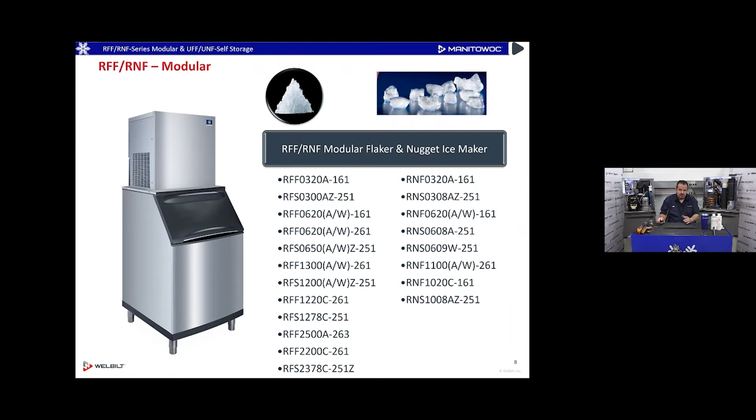So there's a various list of models, everything from a little 300 all the way up to a 2,300 pounder on those ice machines. Now, something with Flaker and Nuggets that is unique is you want to use a special kind of cleaner, and this is the metal safe cleaner.

I'm going to have Will zoom in just a little bit for me on the cleaner type. So they don't use the regular—thank you, Will.

They don't use the regular Manitowoc ice machine cleaner descaler. They use the special metal safe cleaner descaler because some flaked and nugget evaporators are made of a different material that the regular cleaner is too strong for. Most of them nowadays, I'd say about 80-90%, are all stainless steel evaporators, but there are some still out there that used a different material evaporator that it was too strong for.

And you don't really know what kind of evaporator material it is unless you pull the evaporator apart, and you don't want to have to do that just to see what kind of cleaner you're looking for. So we use metal safe on all Flaker and Nugget ice machines.

Thanks for zooming in on that, Will. We'll go back to the presentation just a little bit.

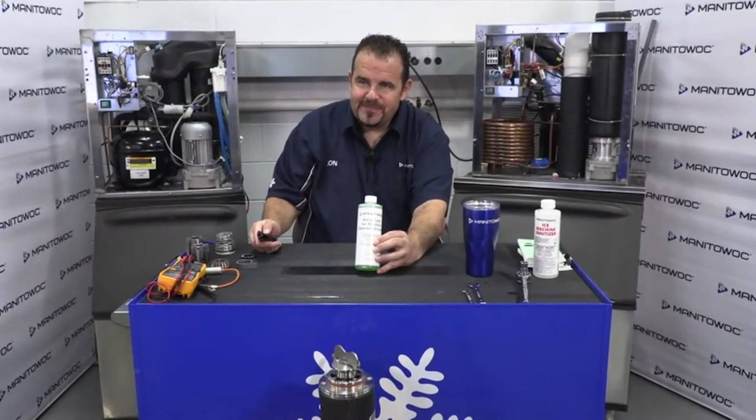Thank you. So just to review, we talked about so far a little bit of model number identification, just to get you familiar with it a little bit.

Self-storage under counter units—those are units that have a bin built into them, and we call those self-storage a lot. And then modular, where we sell an ice machine without storage means.

So it might be going on top of a bin. If it's a really big flaker, it could even be going on top of a walk-in with a hole cut in the roof of the walk-in and just raining flakes in there for a really big seafood store. I've seen a lot of those before.

A modular could be going on a soda dispenser. Now, there is no soda dispenser that likes to dispense flaked ice. They won't do it. But nugget ice, soda dispensers will dispense nugget ice, but they normally need a kit in them that sometimes people forget to convert them to nugget ice.

You can't just take a soda dispenser that's pumping out cubes, throw a nugget machine on there, and expect it to work. They need a different kind of agitator, and sometimes they need a level management kit on them to change the ice level.

So check with your soda dispenser manufacturer, whether it's Lancer or one of our Servend or Cornelius, to see if they need a nugget conversion kit. That's very important when you put one on top of a soda dispenser—you can't just throw one on top of there.

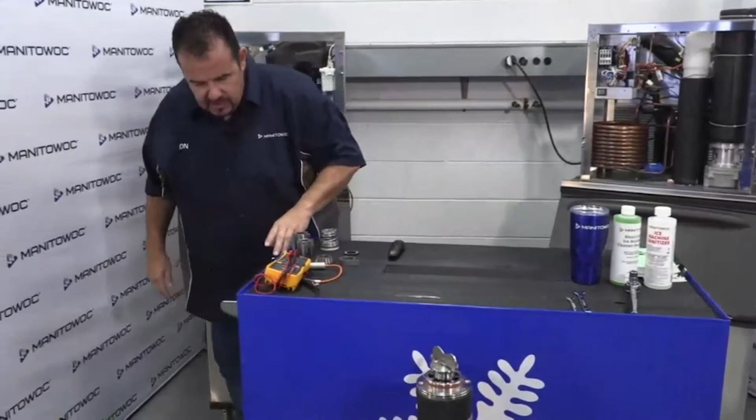All right, so we're going to take a look at a Flaker evaporator unit here in just a second, and I'm going to go through pulling it apart. So I'm going to get up from my seat and come around, and Will's going to work the camera for me so we can show you taking it apart a little bit better. Thanks to Will, by the way, for being on camera and doing about 25 things in the background.

So I've got both a flaked ice machine and a nugget ice machine here, and I've taken them out of the unit. Now, you don't have to do that to service them, but I've taken them out just so you can see it better. Don't think you've got to suck the refrigerant out and cut the tubes to do this kind of stuff—they can be rebuilt without it.

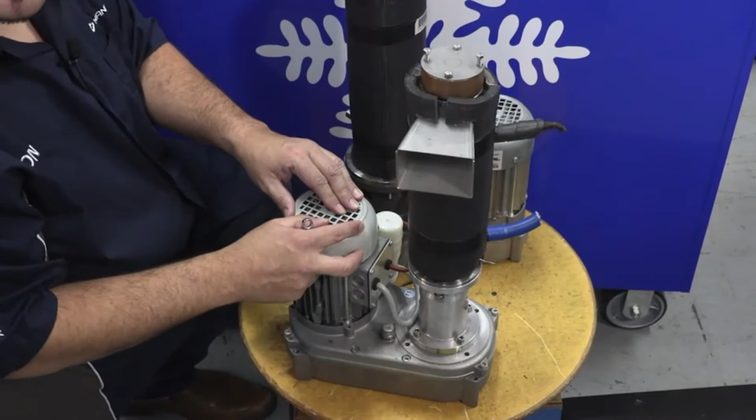So the first one I'm going to do is this flaked ice machine right here. I'm going to be undoing a few bolts here, so be patient with me as I take it apart. Now, why would you do this in the first place? More than likely because you've got complaints about bearing noises.

People are saying it's squealing really loud, it's making a really loud noise, and you want to look on the inside of the evaporator and see what those bearings look like, see if there's any damage in there or any damage to the auger. So we'll take it apart, okay?

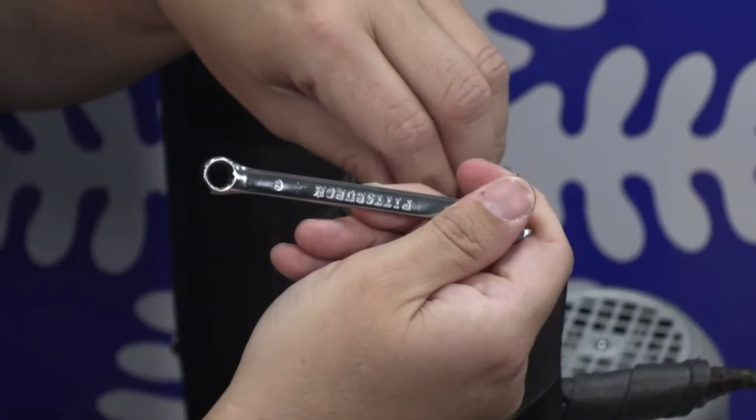So I've got 4 bolts on the top. I already got 2 of them loose, and I'm going to undo the other ones. Now, these are all metric hardware too, so I'm using an 8mm wrench right now to undo the other 2 bolts that I didn't get undone yet. Just remember, Flakers and Nuggets are metric hardware on the evaporators, metric, okay?

So you need to go into your other set of tools sometimes for that. I undid all 4 bolts, and this plate will just lift off. I should also mention, I removed the insulation that was sitting on top of this head as well. It just pulls right off. So I'm going to take that plate out of the way.

Now those 4 bolts, 1, 2, 3, 4, they're holding the breaker assembly in place. I shouldn't call that a breaker, that's just what I'm used to. We normally call it an extruder now, and that's the part that the ice gets forced through. Notice this flaker is a side discharge, okay? Some of our evaporators are top discharge, but the flaker is a side discharge on this particular unit.

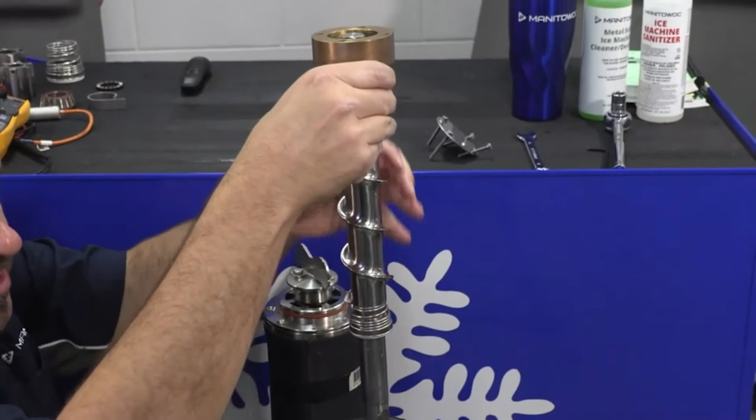So that got it nice and loose, and that's going to allow me to remove the auger. So I can lift this auger up out of the evaporator, and I'm just going to stand it there for a minute so you can see it. It's got the top bearing and breaker assembly on the top of it.

Top bearing extruder assembly on the top of it right here. That has 1 bolt in the top. I'm just going to lean that towards you. You undo that 1 bolt, and you can remove this bearing assembly and extruder as well, and replace it as an item on it.

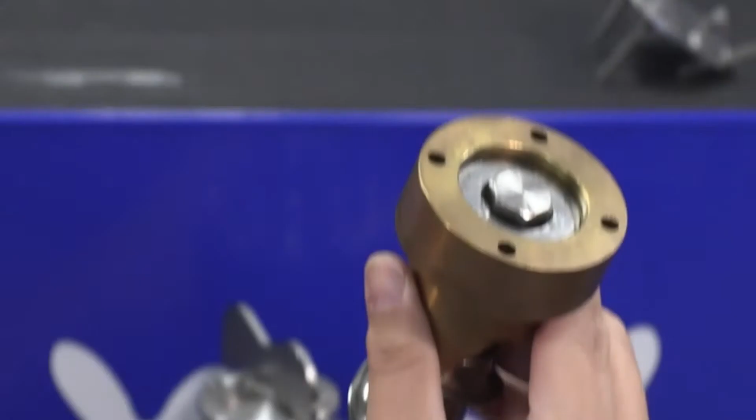So what I like to do is hold this bearing assembly, and I just kind of turn the auger in my hand to see if I can feel any kind of notchy, sandpapery, gritty feeling in that bearing that will tell me if the bearing's got damage or not. I'll just spin it and see if everything looks good.

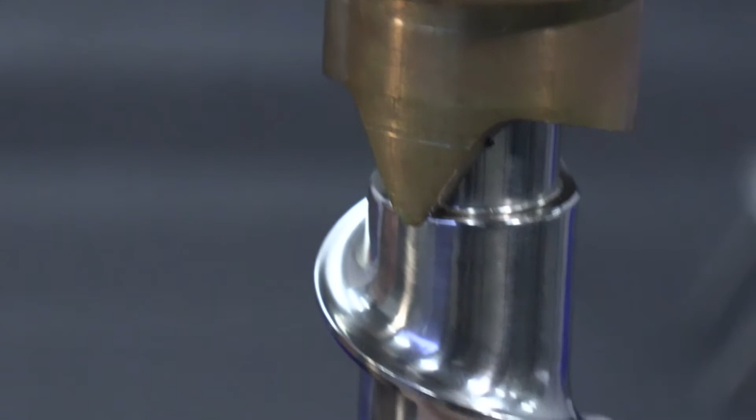I'll also just look at these flights right here. I'm going to hold it still and look at the sides of these flights to see if I see any scraping or notching, to see if the auger's been touching the side of the evaporator, which is not a good thing. So I got the top bearing assembly removed on this one that I just tested. I'm going to go ahead and lay this auger down for a minute.

And the bottom of the auger has a water seal, which I'll show you in just a minute too, okay? Then I'm going to take the bottom bearing out. Now how I do this is there's 4 bolts in the bottom, they are 13 millimeters. I already took 3 of them out earlier, so you wouldn't have to sit there watching me just undo bolts, because it's not the most exciting thing to watch, or maybe it is, I don't know.

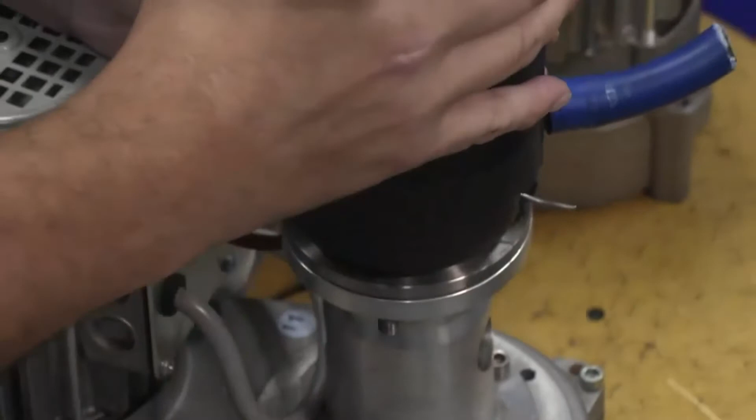So I'm going to take that last bolt out of the evaporator, and I'm going to lift this off the base. Now, if this was in the ice machine, you'd probably get a little bit of height on this base with the refrigeration tubing. You get a nice little gap here that you could take the bearing out if you wanted to, and it's in a bearing housing too to make it easier. What I'm going to do though is put up my workbench so you can see it a little bit clearer.

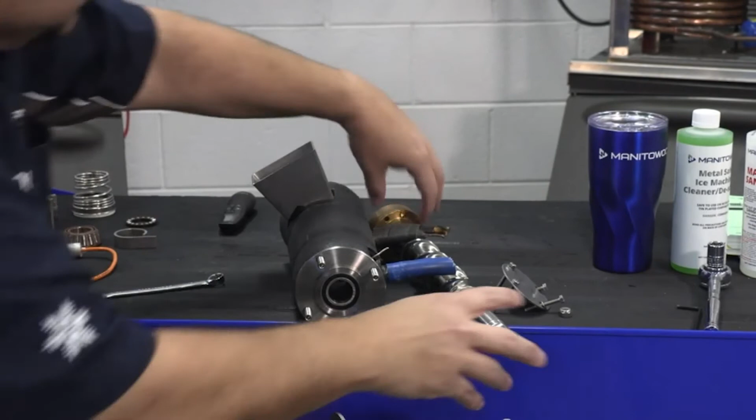All right, let's take a look. There we go, that looks good. So now you can see the bearing here in the end of the evaporator, the lower bearing on that unit. And this one will just slide out. There it goes, it just slides right out.

Now, maybe you're thinking you're getting this out, but maybe a water seal's been leaking and this is all rusted up, so it's not just going to slide out like this for you, right? You're probably like, yeah, he makes that look easy, but it's probably just not going to slide out for you.

And then I'll test the bearing. I'll kind of put my finger in the middle of the bearing part, and then rotate the outer part of the bearing around, holding the inner, just to see if there's any sandpapery or gritty feeling to it. This one's pretty smooth, actually. It's got a few dents in it because it's used here in my factory hands-on school, and I don't know, some student might have hit it with a hammer or something, which you know not to do on a bearing, okay?

But let's just say it's seized in there, all rusty looking, and it doesn't just slide out for you like that one. Then I can take the bearing housing out too. To do that, I reach inside there, and if the bearing's still in there, I'll hook around it and slide it towards the bottom of the evaporator. You can see there's an O-ring holding this part in. That way, if the bearing is seized in, you don't have to get a new evaporator. You could just get a new bearing and lower bearing housing. That makes it a little bit easier to service than trying to force out a seized bearing inside of a housing that's metal molded into that unit.

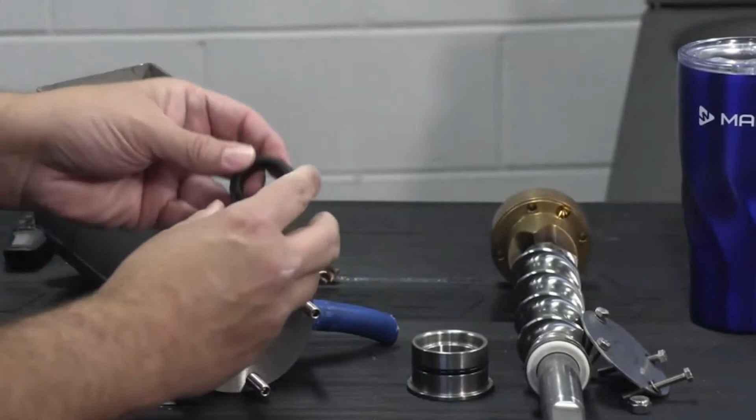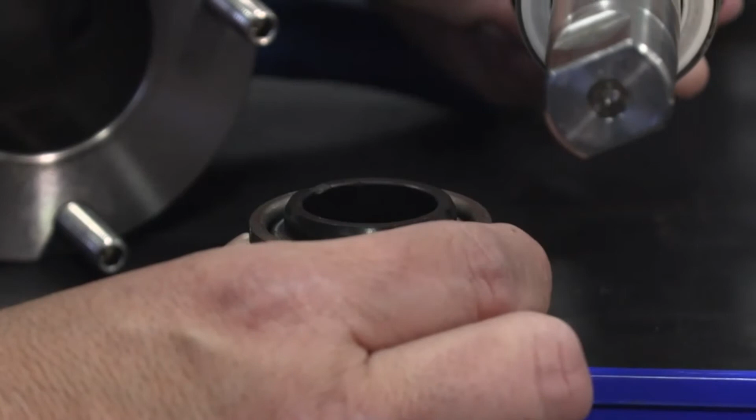All right, so I have the housing out of that evaporator now, and I'm going to show you the water seal. Let's take this housing right here, and I'll put the water seal in. This water seal is a little bit scarred up because we use it for training here in the factory, and it might have come out of a warranty machine too that came back for replacement. You can see the bottom part of the water seal, this black material, and then the top part, this white material, and those two go together.

So when the auger is actually in the evaporator, those two parts are going to sit together like that. The lower black part stays stationary, and the top white part rotates on it, and that's what makes the water seal. I've worked on a lot of flakers and nuggets in my time, always learned the hard way too. The nice thing about this one is there's no sealant in here. Some other units require silicone sealant, and if you pull the auger out, you better have a new water seal, because you'll break it and need to install a new one if you ever pull the auger out.

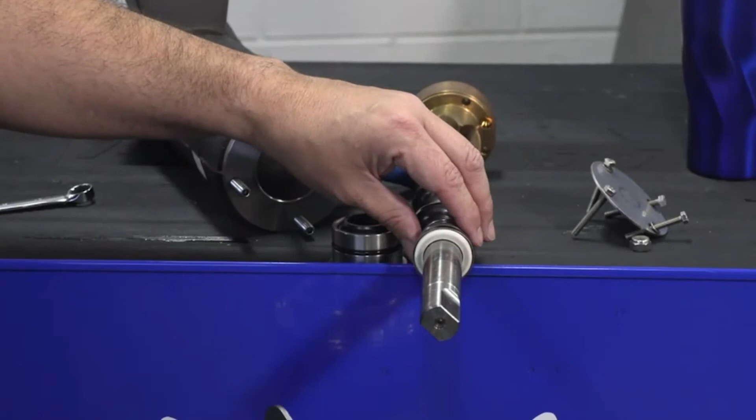So it's very important that you carry that if you're working on a different kind of manufacturer, but not ours. This is a great setup, a really nice setup. I can take this off the auger too. It rides on a little spring, and I'll just rotate it down so you can see it. Now you can see the top part of the water seal, and I'll put it on the bottom part, and it'll ride in there just like that in the unit.

Now you might say, water seal, why do we need a water seal? Well, here's what people forget: this whole evaporator barrel is filled up with water. This barrel right here is filled up with water, and then we have a shaft that has to come through the barrel and through the water into some kind of gearbox to turn the auger.

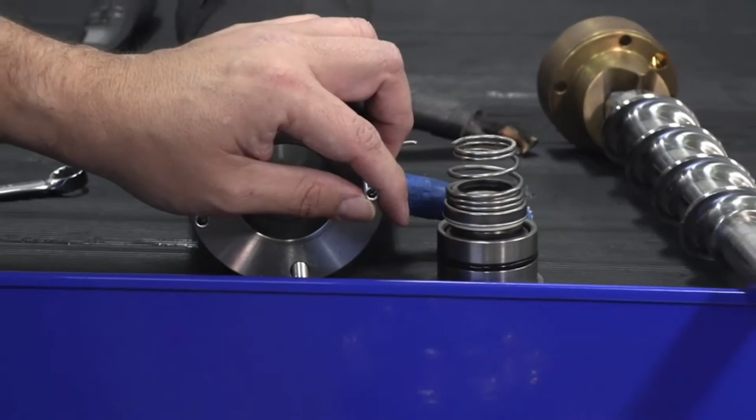So you have to have some kind of water seal holding that water back from going into the gear motor. If you ever open up a Flaker or Nugget, whoever the manufacturer, and you see a nice film of oil on the bottom of the unit and the bottom of the modular base, that means oil is escaping the gearbox somehow. The gearboxes are sealed, they're watertight, but what happens is when a water seal starts to fail, the water gets through the water seal and runs down the shaft of the auger, and then the water gets into the gearbox and washes the oil out.

Took me a long time to work this out, so maybe you won't have to go through all this hardship. Once the water gets into the gearbox, it's going to force oil out of the gearbox eventually. Even a waterproof gearbox, it'll force the oil out the shaft seal or something like that. So if you ever go up to a Flaker or Nugget, even if it's working and you're just doing a PM, and you see a bunch of oil on the floor of it, like a film, that means the water seal is leaking water, and that's pushing the oil out of the gearbox on you. So that's another thing to check when you're working on this.

So we're going to want to take a look down the inside of this evaporator. I'm going to hold it nice and still for you, and we want to look for any scoring or marks in there. Oh, this is a great shot. You can see those vertical lines in that evaporator.

They're normal. They help the ice stick to the walls of the evaporator. A lot of people think that ice forms in this evaporator because it's so cold, and then it sticks to the auger and the auger pushes up. That's not how they work. What happens is ice sticks to the walls of this evaporator barrel, I call it, and then as it gets bigger, the auger pushes that ice off the walls and pushes it up to the top.

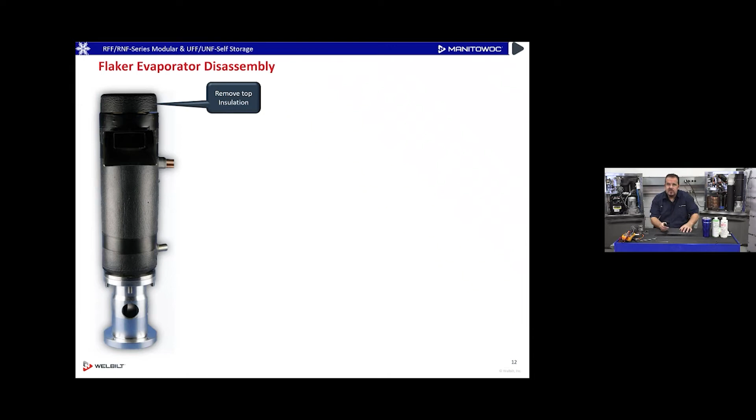So let's take a look at it. I'm going to remove the top insulation, just like I talked about, and pull that insulation off the top. I'm going to undo my 4 bolts, then lift my auger out of the evaporator. It's going to pull up out of that evaporator.

Oh, another tip: do this when the evaporator is warm. If it's cold and you just turned it off and drained the water out of the evaporator and you're pulling that apart while it's still cold, it doesn't come apart real well. So wait till it's warmed up to room temperature. Drain the evaporator, there's a little bleed off drain on it, I'll show you that in a second, and then you can take it apart when it's room temperature.

Some units have a thrust and radial bearing on top, which is kind of cool. So when it comes to flaker nugget design, it's all about 2 things: the bearings being really tough, and the water seals being really tough. Those are the 2 things that make a good design.

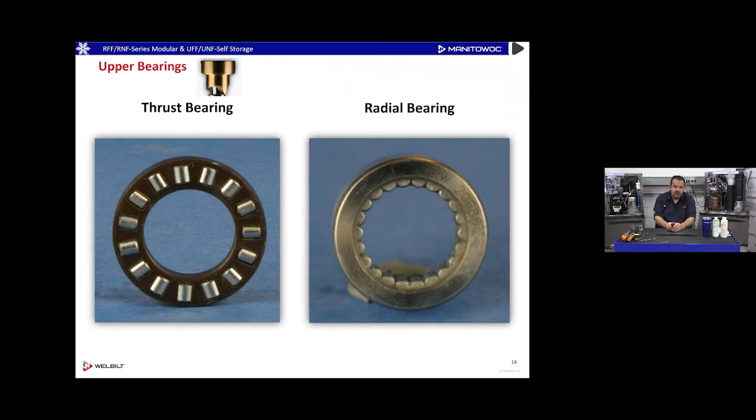Some evaporators have 1 bearing on the bottom, that's it. Some have 1 on the top, that's it. This one has 1 on the bottom, like I showed you, and then it has 2 bearings on the top. It has a thrust bearing to take up the up and down play of the movement of that auger as it makes ice, and then it has a radial bearing to take up the left and right play on it. So really strong ice machine.

And if you ever try and hammer it out, that water seal is going to break as soon as you put any kind of pressure on it. I've broken them before by just dropping them on a concrete floor from up high off my step ladder. I've broken them that way too.

All right, bearing and water seal retainer, lower bearing on that machine as well in that unit.

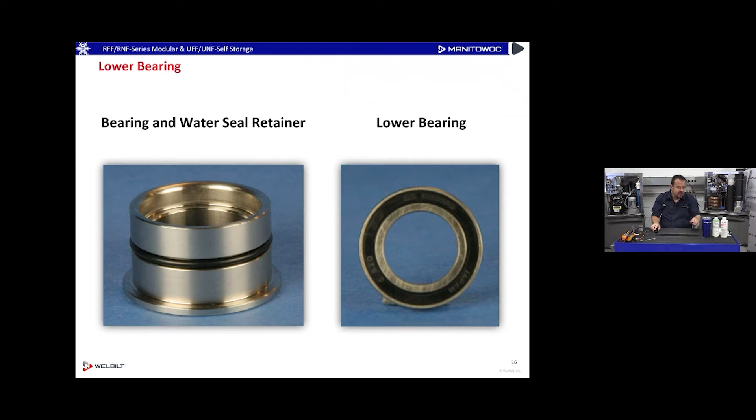All of this stuff that we talk about on these units too, as a review, can be found in your technician handbook. So I've got a technician handbook here, an R model technician handbook, and then an RFF RNF technician handbook too. This information can be found in these tech handbooks, picked up at your Manitowoc distributors. And then I also have, before I forget for later on, a countertop handbook as well, for those machines too.

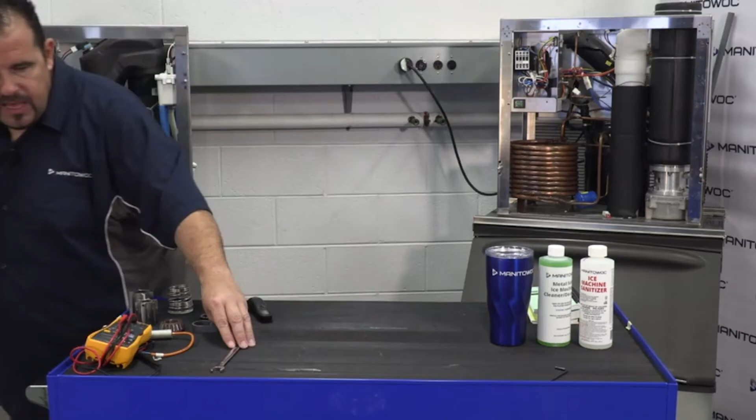All right, so we talked about reassembling and disassembling the Flaker. Now I'm going to take a look at a Nugget machine. I'm going to pull this nugget apart so you can see it's a little bit different, but kind of the same on this machine. To pull it apart, it's going to be all metric tools, so I'm going to need metric tools to take this thing apart.

So here's my nugget machine. Let's spin it around so you can see it better. This is actually an RNS 600, so a slightly bigger evaporator. We have 300s, but then we have 1200s as well that are much bigger.

You can see this weird little thing on top. This is a top discharge, ice comes out the top. You can see this little weird thing on top - this is the ice wiper that, when the ice comes out these extrusions, it comes up into a top little cup, and this forces the ice down the chute as it goes down.

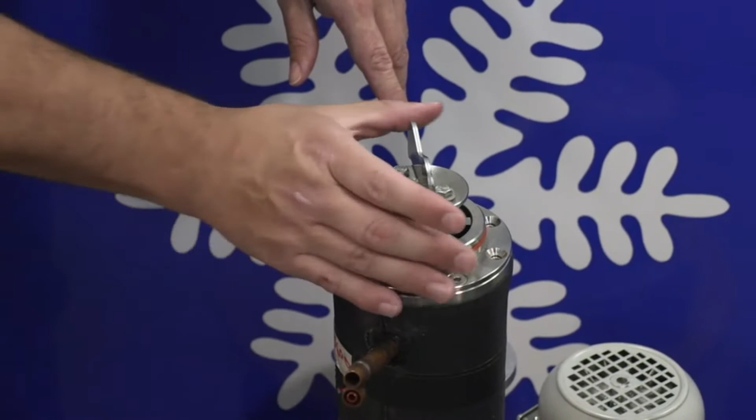So I'm going to take this apart a little. I'm going to take off this wiper, which just unscrews counterclockwise, obviously. So I'm going to take the wiper off, out the way, and then I have these Allen wrench bolts that go through it that, again, are metric.

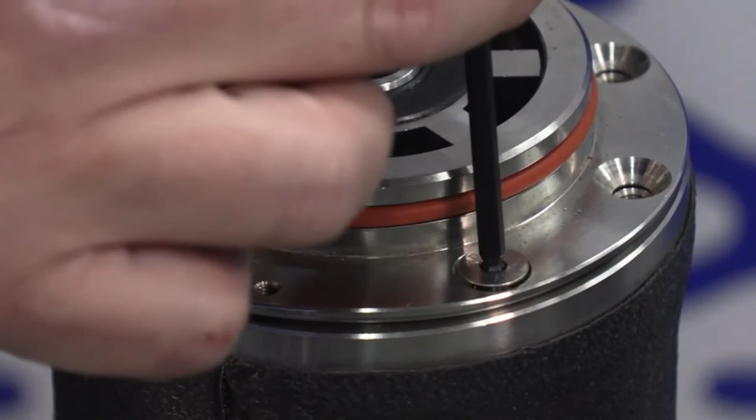Get my hands out the way. If somebody's been working on it with a non-metric Allen wrench, you're going to see sometimes they might be kind of rounded out a little bit. I took most of them out already, but I've still got 2 left in there that I'm going to take out. I'm going to try and keep my hands out the way so you can see. There you go, that looks good. You can see that coming out. So I'm going to take that one out the way too.

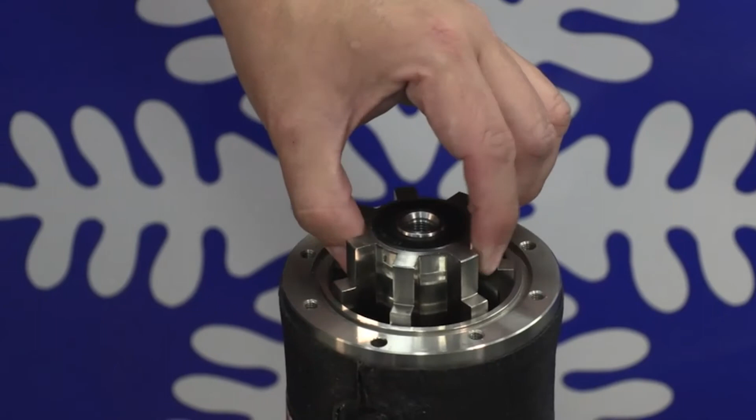And this will take my top plate off. So my top plate is going to come out. There it goes, my top plate. It's keyed to fit onto this cutter head or extruder on this evaporator. So I'm going to pull this out the way, just going to put that out the way. And then I'm going to take this extruder out. I can just wiggle it a little bit, and it will come off the auger shaft.

See that extruder? I really like the way these are made. You can see it's got some sharp points to it as the nuggets get forced up. You could actually change the thickness of those blades, you could call them, that come up to change the size of the nuggets. As a manufacturer, you would never do it in the field, but you could do that.

And this contains the bearing, okay? This is the top bearing extruder head assembly, and you can order that as a piece, so you don't have to force the bearings out of it. It comes as one assembly to try and make your life as a servicer much easier.

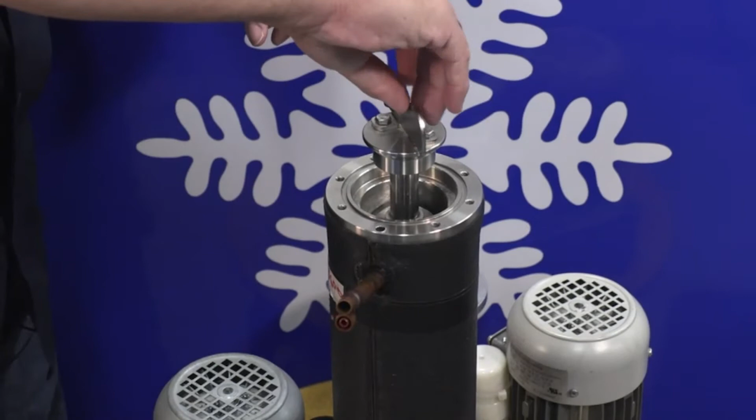Now I'm going to take the auger out, which is kind of heavy, and you can see it's kind of awkward to pull this up, there's no shaft on it. So a lot of times I'll bring my ice wiper back in here and just kind of screw it back into the shaft so I have something to grab onto on that unit. So I screwed it back to the shaft, and now I can just pull that auger up much easier and remove it from that evaporator, just like the other one. You can see at the bottom part of it, we've got the upper half of our water seal again on that auger assembly. Going to move this out the way.

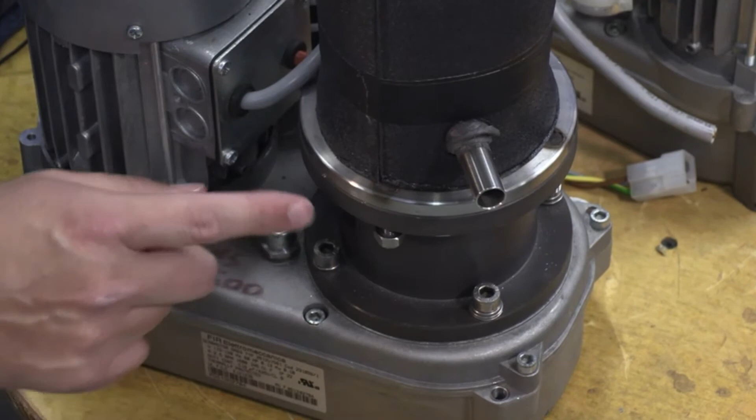And then I'm going to undo the bottom bolts of my evaporator. Now, depending on the size of the evaporator, you may have to undo these lower bolts, which I'll show you on the screen, and turn the evaporator a little bit. Depends on how big it is to get to these bolts. But this one's not bad. I can get to all of these bolts nice and easy. And I got one left on here that I didn't take off, another 13mm bolt.

Take that out the way. And then I should be able to lift this evaporator off. Remember, if it's in the unit, you're only going to lift it so high on that unit.

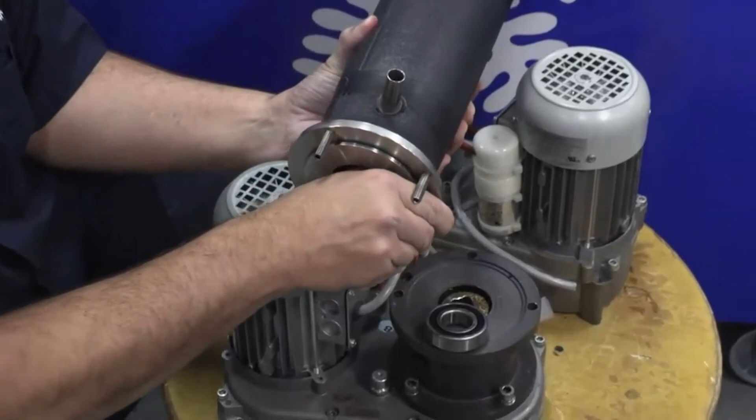Now this one, the bearing stayed on the bottom base, and I can just take that bearing out of there. So the bearing stayed on the bottom base. But again, the same setup. This one's a little bit bigger, but it's still got a bearing assembly on it, and I've still got the black lower half of my water seal in here. So if I take this lower assembly out, you could see the bottom of that water seal. So I'm just gonna run this out of here.

There we go. It's got an O-ring that holds it in place. And then you can see that bottom half of the lower bearing assembly, just like the other one. So very similar setup. Top is a little bit different because it's a top discharge, but you can see it in there.

If things are seized up in there and you can't get this bearing out, I'm going to spin it over. It's okay, I'm just going to get it in camera. If you can't get this bearing out, the lower half, you can just take the whole assembly out and replace the bearing and the lower assembly in there.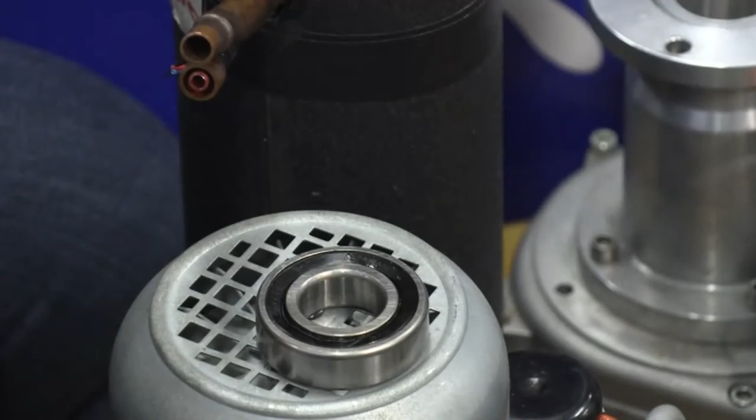So let me just show you something. To put this bearing in, it always kind of fascinates me, it's such a tight fit. If you go at an angle, and remember, you might be doing this upside down, if you go at an angle, it's not going to go in. But if you go perfectly level on it, the bearing drops in on these units. So the bearings just drop right in when you go perfectly level. And then when you turn it upside down, they normally just fall right out of those units, okay? But if you kind of go at an angle, it'll get jammed.

And then if you start hammering it - far be it from anyone to do this - you're going to be really in trouble. So they just drop nice and easily in. They have such a tight tolerance.

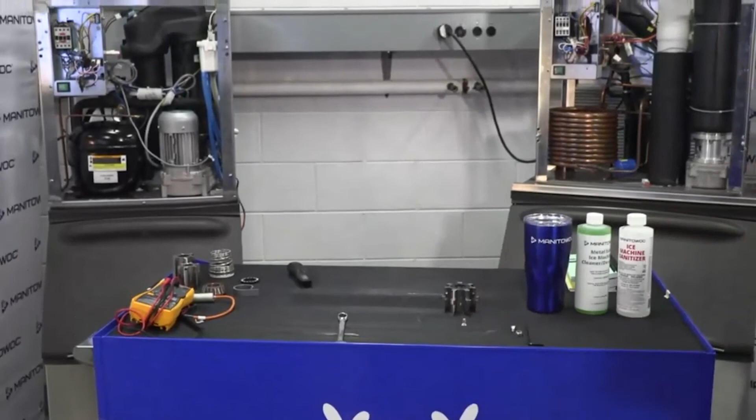So I'm going to put this stuff out the way. I'm going to leave that cutter head there. Oh, there we go. Get my hands dirty today. My goodness, whatever next, right?

And let's take a look on the screen at it. Thank you, Will. Let's take a look at the screen on it just to go over it. So when it's inside the ice machine, and we've got all the plastic stuff on it, everything like that, I'm going to show you removing that.

So I took the insulation off, and then I removed the micro switch. This is a safety paddle switch. Basically, it's almost like a second bin switch. If the first bin switch fails and ice starts to back up into the chute, this paddle switch will hit ice, and then that'll turn the ice machine off. So it's almost like it's got two bin switches in case one of them fails closed.

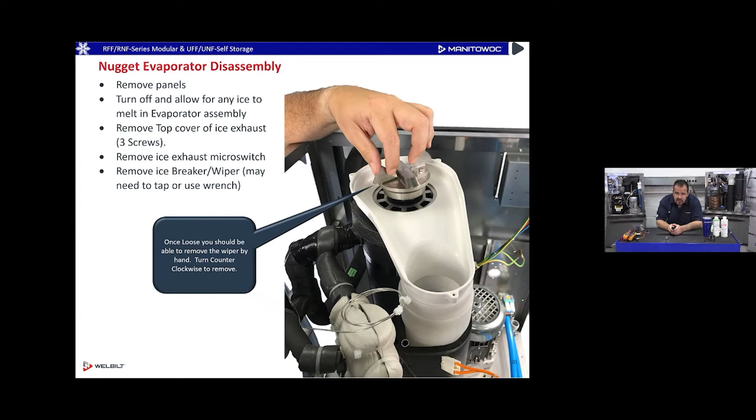Then I'm going to remove this little ice wiper out of here. It will just unscrew. Once loose, you should be able to remove it by hand. Sometimes at first they're kind of tight, and I just give them a little tap with a soft hammer or something like that, like a rubber mallet, and then they loosen up, and then I just undo them by hand. Again, such a tight tolerance on there. They screw in and out so nice and easy on those machines.

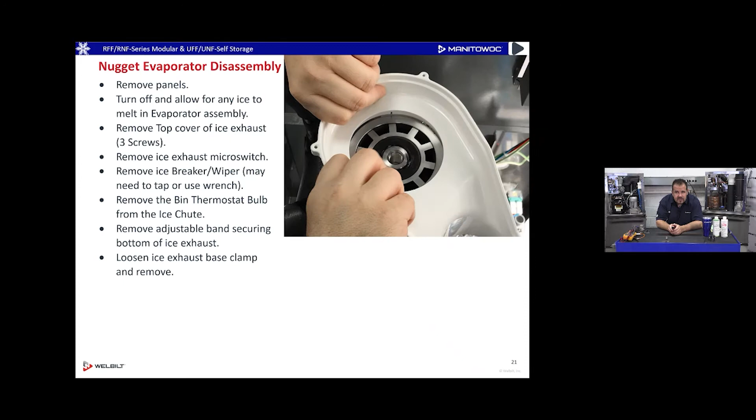I'm going to remove the bin thermostat bulb, and then I'm going to pop off the plastic that goes between the chute where the ice goes down into the bin and the top of that evaporator. So off comes that chute. I'm going to take that chute out the way, remove the whole ice chute, and then I'm going to take this ring of insulation off. It just lifts up too on that machine. It just lifts right off too. So we're going to get that right off there on the insulation, and then we're going to undo my little metric bolts on the top of it, like you saw me do.

That'll lift the cutter head out of the way. I can put the ice wiper back on again to get it loose, and lift up that auger. If you have to use a pry bar to break it loose, make sure you pull straight up to remove it. Normally they come right out, but if you're there, you're probably there because of a problem.

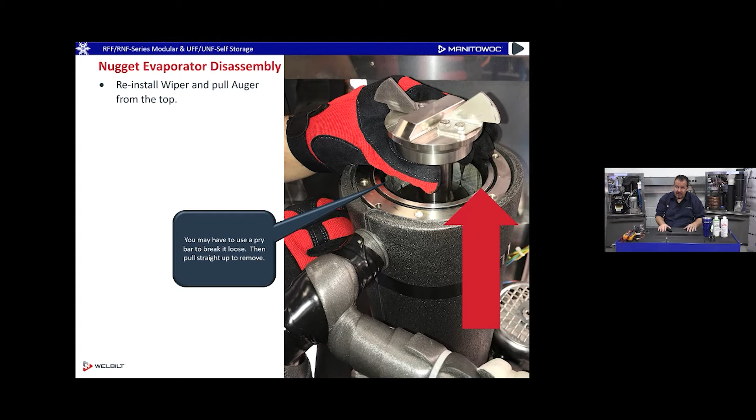Like a seized bearing or a bunch of scale in it, so you have to be a little more careful with those units. We're going to lift that evaporator right out of that unit and pull it right out the top. We're going to lift that auger right out the top there too.

So the auger comes out, and again you're looking for scale on the auger, any dents in the side of those flights, anything like that. On the top cutter head, I'm looking for a nice, smooth bearing in there. I might put my finger in there, hold the inner race of the bearing, and turn the head or bearing around on my finger to make sure it doesn't feel sandpapery or gritty.

Looking for scale inside this evaporator. See these nice long grooves? It's really important they're clean, otherwise the ice won't stick to the sides of the evaporator. If there's a lot of scale on there, the ice won't stick to the sides of the barrel or walls, and that's what you want. Instead it'll form and then just kind of fall off into the middle of the auger, pushing that auger sideways, and then we'll get a lot of bearing problems on those units.

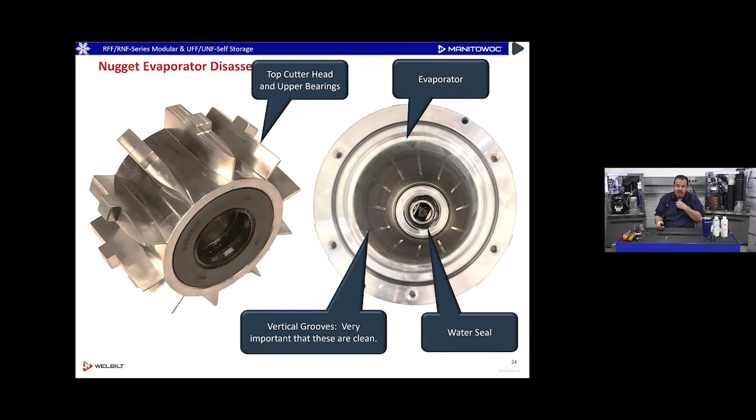Now, to get this one out, for the lower bearing, I had to rotate things a little bit for this big one. So I got my liquid line solenoid valve out of the way and loosened my lower bolts. You can see I'm using a little ball joint Allen wrench here, which is really nice, because it's difficult to go in at an angle sometimes. So I've got all the tools here available to me, using a little ball joint in there to get those loosened up.

And then I can rotate it, and I'm going to take out my rotation sensor, which I'll show you a little bit later on. When I reinstall my rotation sensor, here's a great tip I never even knew. Pre-wind the wire. I have to learn everything the hard way.

This rotation sensor screws in, and it's on a piece of wire. If you just kind of put it in and start screwing it, the wire gets all messed up and bundled up. So a good idea is to pre-wind the wire the other way, and then when you screw it in, the wire straightens out. That's a good tip for anything - if you're working on a car, a spark plug, or anything, it's always good to pre-wind the wire so when you screw it back in, it straightens out the other way.

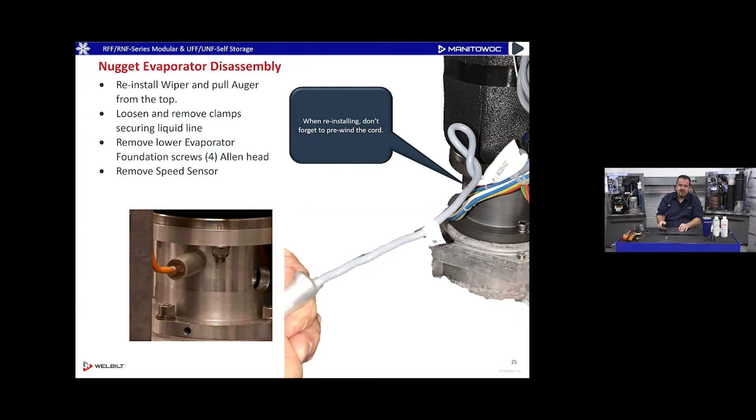So there's the speed sensor on this machine. Once I've got that rotated and can get to the bolts at the bottom of the foundation, I'm going to loosen those up. Notice I'm doing it in the machine here - I didn't take it out and put it on a workbench. The refrigeration tube is still all connected up to this machine.

There's a keyway on these evaporators, so you can't get them in wrong. There's a little bolt on the top of it, and a little hole in the foundation, so when it goes back together you can't get it in the wrong way. That's another really smart idea - we didn't have to do it, but we tried to make it easier for a service guy, so his life is easier when putting things back together and it all locks in.

If you do have to force out a lower water seal or a bearing because it's stuck in there, maybe it's rusted in, and you want to save it because you didn't order a new one, get it out with a nylon removal tool. This is actually a nylon removal tool that we sell, that you can put in there and force it out nice and easy with no damage.

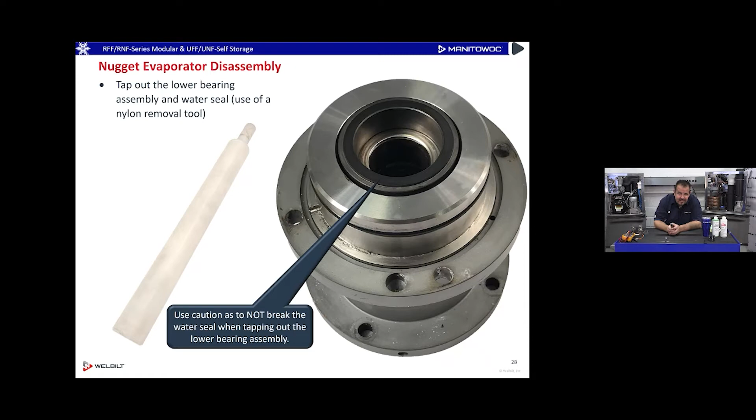Like I said, those lower halves of the water seals are pretty brittle and will break if you hit them with any kind of hammer hard enough, or if you drop them on a concrete floor from a high height, they'll break too.

So just to review, we looked at a Nugget evaporator disassembly after the Flaker, upper bearing, water seals, lower bearings. Remember, two most important things in a Flaker Nugget build are bearings and water seal. Those are the things that will get you in trouble.

And you gotta keep it clean, right? You gotta keep it clean. A scaled up evaporator will make that auger go sideways, and then you'll have a failure on your bearings. I always used to say, if you've got a cuber and you never clean it, one day it's going to go down, somebody's going to clean it, and you'll be back in business, hopefully. A Flaker Nugget, if you never clean it, evaporator's going to get scaled, the auger's going to go sideways, there's so much forces on it, and then it will destroy the bearings and the water seal.

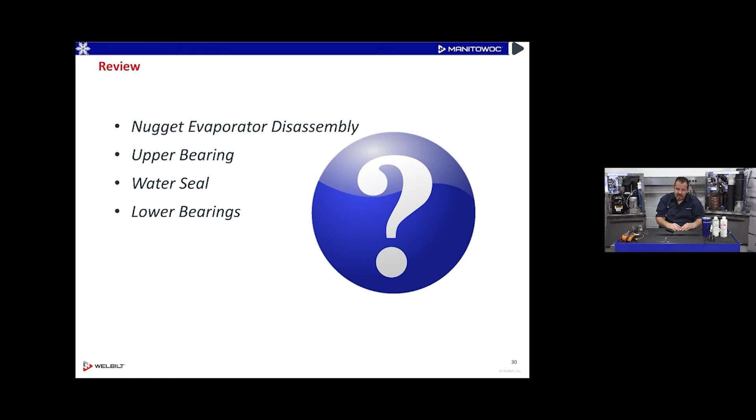So if you never clean a Flaker Nugget and you end up replacing water seals and bearings, that could cost you $1,500, $2,000 in parts for bearings and water seals. So it's very expensive if you don't clean it. If you have a PM customer that's got a Flaker Nugget, as long as you clean it at least once every 6 months with chemical cleaner, you should be in good shape. But if they never clean it and it's been 6, 7 years and they call you and say it's squealing like crazy all of a sudden, that's a good indication those bearings are gone, that it's tore up those bearings already. You might be able to clean it and get it back in shape, but if it's squealing really bad, it's probably too late for those bearings already.

All right, so that was some of the mechanics of it. I hope you enjoyed that little breakdown. It's nice to do a little hands-on part on it. And we're going to take a look at some sequence of operation on them now, okay?

We're going to be pretty quick with this. They don't have control boards in them. So it's kind of old school, where it's just one safety switch after another safety switch on the Flaker Nuggets. The countertops have control boards, but these don't. It's just you put electricity into them, and if they get through all the safety switches in a row, then the machine runs. But if one of those safety switches stays open, then we got a problem with it.

And we got a problem with that unit. What's that?

Yes, I have a rotation sensor right here. I'll show you where it is on this machine in just a second. So this is my rotation sensor. Thanks for reminding me, Will. And I'll show you where it is on the machine as well. Great little item, I only got 3 wires coming out of it.

That's it. But it makes sure that the speed of the evaporator is up to speed before it lets the compressor come on. Why would that make a difference? Well, if the evaporator is turning slow, that's a good indication there's something wrong with the bearing, or that there's still ice frozen in that evaporator somehow, and we don't want to run it slow and just force it against ice. I think what some people don't realize is that barrel is such a big chunk of metal, just because the compressor goes off, it doesn't mean it stops freezing ice. There's a lot of residual refrigeration in there, and it still keeps freezing ice in the evaporator when that compressor goes off, because it stays cold for quite a while, maybe 10 minutes. It could still freeze ice in there.

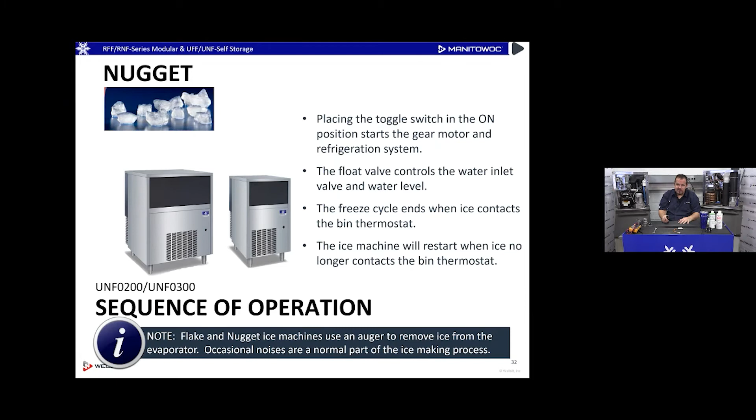All right, Flaker and Nugget ice machines use an auger to remove the ice from the evaporator. Occasional squeaks are normal, especially when they're new and they're just kind of breaking themselves in. But if it's squeaking all the time and your customer's like, oh my gosh, what's going on, that is not normal on that machine.

Oh, I'm sorry, a little bit quick there. So I got an on-off power switch on these little under-counters. I throw the power switch, and like I said, I'm going to go through step by step my safety switches. So my bin thermostat has to be closed for the machine to run.

My low temperature safety has to be closed. I don't want to start that ice machine up with a cold evaporator because it might have ice frozen in it, and that would destroy the gear motor if it was a solid block of ice in that evaporator. So I'm going to go through a low temperature safety thermostat.

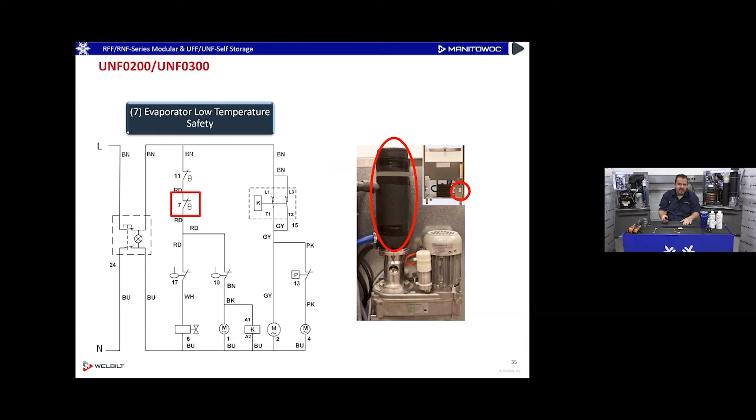Then I'm going to go through a low water safety switch. I don't want to run my evaporator with no water in it - that's going to cause damage. So I have a float safety switch in my float reservoir, and if it's not up, it says I got no water and I'm not going to be able to run. So I get through those.

If I get through all those, then my gear motor is going to switch on, right? My gear motor is going to come on at that point, and my gear motor is going to run, and my contactor and compressor are going to pull in on that ice machine. My condenser fan motor is going to cycle on and off. It does have a fan cycle switch on it.

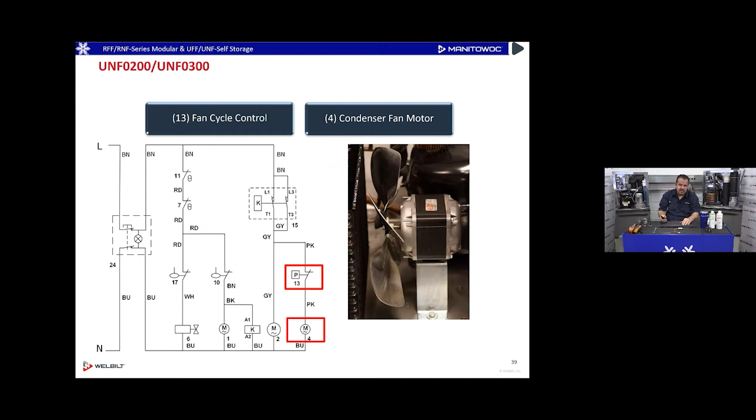Some Flakers and Nuggets don't have fan cycle switches on their condenser fan motors, but ours do, so just be aware of that. It does have a fan cycle switch on it, and it's normal for it to see it cycling on and off in a 70-degree, 75-degree room as it makes ice. That's pretty normal for it to cycle on and off like that.

So I'm going to go through all my safety switches. If they're all closed, I'm going to run. Okay, so I got no safety limits, no service limits, no blinky lights, nothing like that. Just old school safety switches that have all got to be closed to let this thing run. So we're trying to protect our evaporator because it's costly and expensive on that unit.

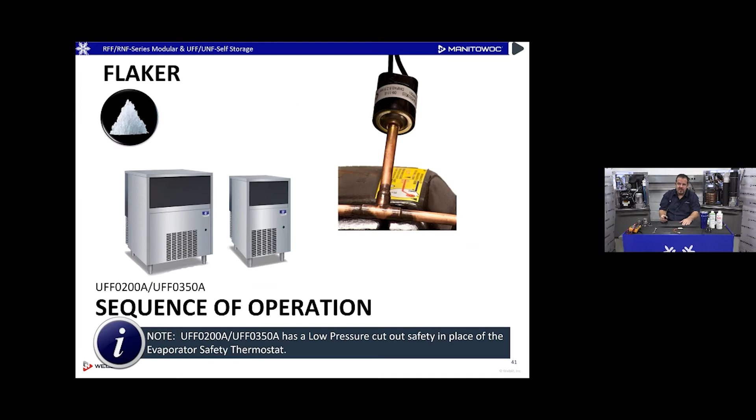Now we're going to add a pressure switch. The 200 and the 350, they have a low pressure cutoff safety as well instead of a thermostat. So, as you know, if something's cold, the refrigerant pressure is going to be low. So we're going to use a low pressure switch to cut it off for safety if that's a safety concern right there in the machine. Instead of a thermostat, we're going to put a low pressure switch on that instead. So, low pressure safety switch.

Now we're going to step up a little bit, and we're going to look at a modular unit, which is not an undercounter. It sits on a bin or a soda dispenser, I don't know. And we're going to have some more safeties on it.

By the way, hotel dispensers, I call them, they are not set up to dispense Nugget or Flake ice. They won't do it. Hotel dispensers, they're not going to dispense Nugget or Flaked ice on Manitowoc hotel dispensers, just so you know. So again, we're going to use an auger to move through there, and we want to protect those expensive bearings, that expensive gear motor and drive.

So our safety switches are the protection. The more safety switches you can have for protection, the better. So as the machines get larger, you start to see more safety switches on it. So again, I got to have a bin thermostat closed for it to run. Then I've got a high pressure switch in line. Then I have a safety switch, which I talked about a little bit before. But there's a safety switch.

So if the bin thermostat fails and ice starts to back up into the chute - if ice is backing up into the chute like a bad lunch, then you don't know what to do. If it's backing up in there and it gets into the evaporator, it's going to cause damage. So you don't want it to back up in the chute, right? You don't want to cause that damage in there. So we got a safety switch. Bin thermostat fails closed, doesn't go off when ice touches it, backs up into the chute. It goes off on this little paddle switch on the unit.

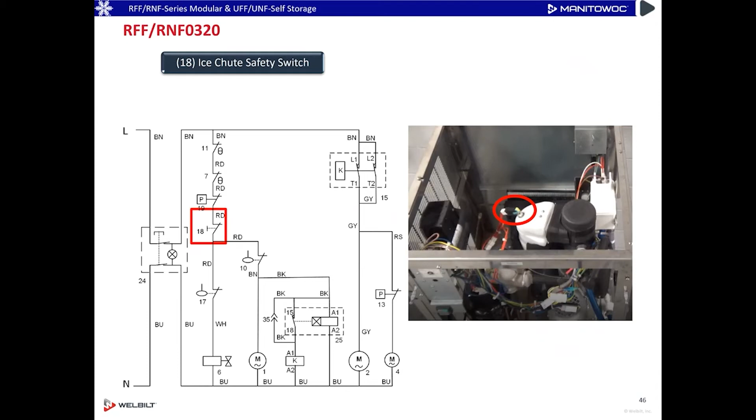So very important - again, water safety switch. Very important we don't run this ice machine with no water in it. So we have a float safety switch in the water reservoir so it won't run.

If all that looks good, we're going to start our 8-minute time delay on our compressor. So the auger comes on and it's moving, it's looking good. We're going to wait 8 minutes for our compressor to come on. Why do we wait 8 minutes? Maybe there's some residual ice in the evaporator still. Maybe it went off in full bin and then went back on really quick. So we want to make sure the evaporator clears out of all the ice that might be in there before we start more refrigeration.

If you can't wait 8 minutes because you're a busy technician, there's this little jumper hanging out the side of the unit to jump it out. I'll show you that in just a second when I show you the rotation sensor. So if you can't wait, you're just going to jump it out. But that's a high voltage jumper, so don't put a bent paper clip in there with your fingers. You're going to light yourself right up. So you're going to jump it out if you don't want to go through that 8-minute delay.

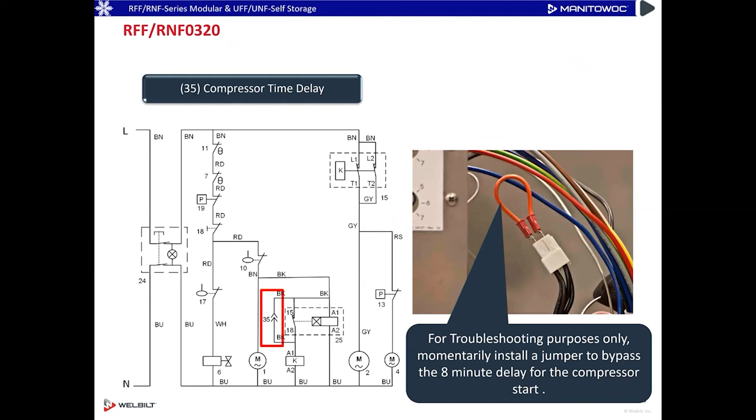We used to have a little tool to plug into that switch. We included it with the machine, but then people started leaving it just plugged in. They'd walk away from the machine and leave it plugged in. So we don't supply that tool anymore, and you have to make up your own one. The idea was if they make up their own one, they're more likely to take it with them than just leave it plugged into the machine.

All right, if I get through all that, get through my 8-minute safety, my compressor's going to come on. I'm going to start making ice. The fan's going to cycle on a pressure switch as it needs to on the head pressure of that ice machine. So again, safety switch through safety switch.

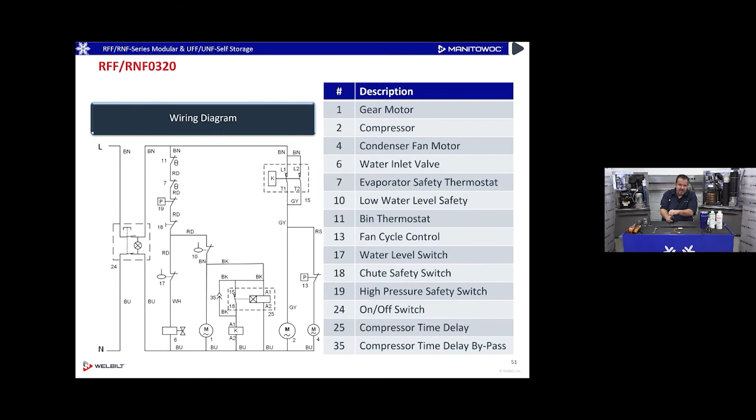It's a little bigger, 600 now. Bigger machine, more safety switches. Well, I shouldn't say more safety switches, but slightly different safety switches. And the biggest one here is the rotation sensor.

So as a reminder: power switch, bin thermostat, low pressure switch got to be closed, high pressure switch got to be closed, safety chute got to be closed. Then I get to look at my water, make sure I have water. If I have water, my gear motor comes on, no compressor yet. My gear motor's turning now, and then I go to my rotation sensor.

So I'm going to have Will take a look at this rotation sensor for you on this ice machine behind me.

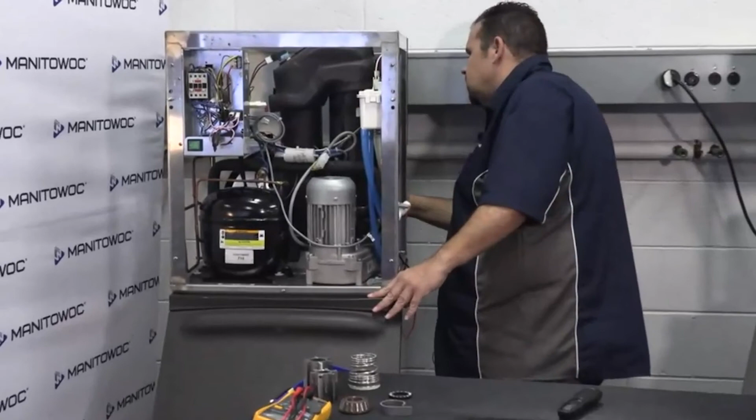Right, so this ice machine is plugged in, and I'm going to switch it on, and then you can take a look at this rotation sensor. So I'll just switch it on. And because all my safety switches are closed, I know you can't hear it very well, but my gear motor and evaporator are now running. So I'm going to rotate this to the side so you can see it.

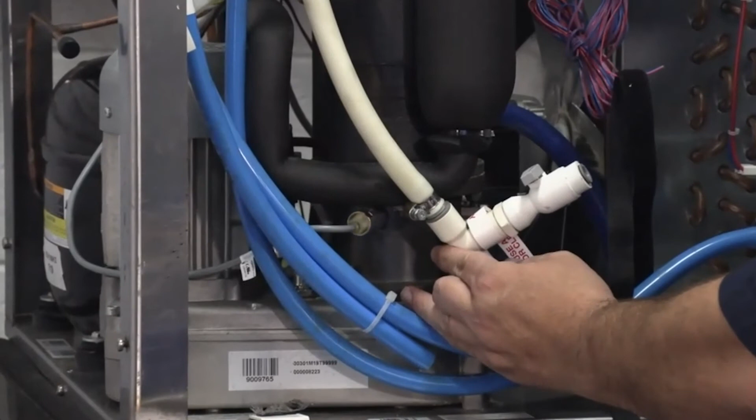There you go. You see I have this rotation sensor screwed in to the side of my evaporator, and it's blinking right now. It's going to blink like this for 8 minutes, letting you know it's in its time delay.

While I'm here on camera, you can also see this drain-off valve right here. If I wanted to pull this evaporator apart or clean it, I've got this little drain-off right here, so I can point this into my bucket, open it up, and drain my evaporator out nice and easy. Some evaporators in the industry, you just have to pull the bottom hose off the evaporator and try to catch the water, and it goes everywhere. So this was an improvement for a service guy, so he could just drain it into a bucket and not have to deal with that on the machine.

All right, so there's my rotation sensor blinking away. When I get to 8 minutes, it's going to go solid yellow, and my compressor is going to start. I'm going to rotate this ice machine to the front, but I'm going to keep Will's camera on it.

And I'm going to pull out the bypass. I can't pull it out too much, but I'm just going to hold it there and see if Will can zoom into it, hanging out the side of my control box. That's good. Hanging out the side of my control box is this bypass right here.

If I wanted to bypass the 8-minute timer, I'll show you what the bypass tool looked like that we used to supply. So here's the bypass timer on this machine, and all I have to do is plug it in here. And I don't know if you can hear that, but my compressor came on.

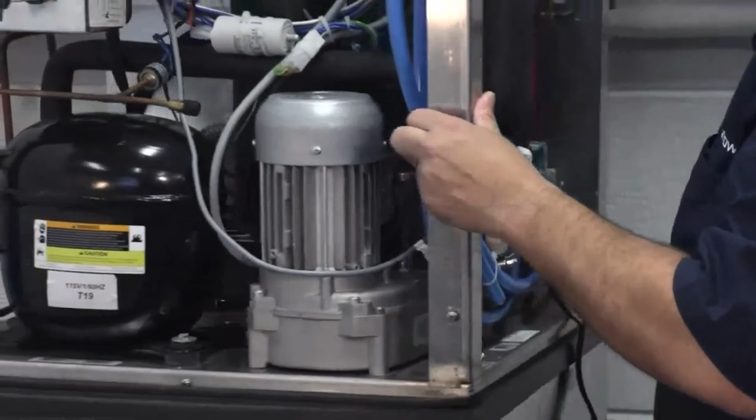And yeah, you can see it's gone to a solid yellow light on that machine now. I'm going to rotate this back, and I'll just switch this ice machine off for now so you can hear me.

So my rotation sensor - if something goes wrong with this rotation sensor, if it's not up to speed, it will go red on you, okay? So there it goes red, now it's flashing red. This means that my auger wasn't turning up to speed.

So more than likely, when you walk up to the machine and see this red light flashing on the speed sensor, it means the auger was turning too slow. Could be a bearing, could be scale, either of those could make it turn too slow. And actually, they will flash if the auger was turning too fast as well, which is very unlikely, but they will flash for that too. In the technician handbook, it will tell you about that rotation sensor and the revs per minute it's looking for. We can help you with that with tech support, but basically, if it's flashing, it's turning too slow - maybe it's scaled up, maybe it's got bearing problems already, and it's too late for it.

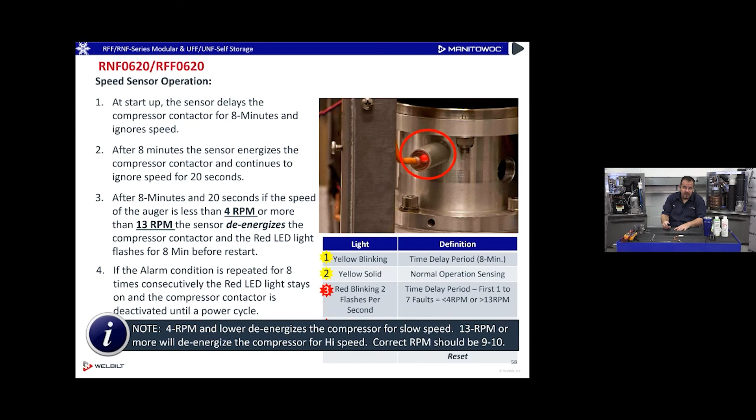So if you're thinking maybe it's just a rotation sensor malfunctioning, you could check the rotation on it. It's really important that you understand the rotation sensor and its function. Could it fail? Anything could fail, of course. So if you've got one that keeps locking out and it is rotating at 9 to 10 revs per minute, you could have a rotation sensor problem. Unlikely though - I rarely see rotation sensor problems on these machines. It's a good, reliable little unit, and it uses sensing to see where it's moving on the rotation.

It's not like a tachometer that shines a light. It's more like a rotation sensor - a Hall effect switch. Like a burglar alarm when you move your hand and it picks up motion. It's more like that than something that shines a light off something reflective to count how many times it sees it on that machine.

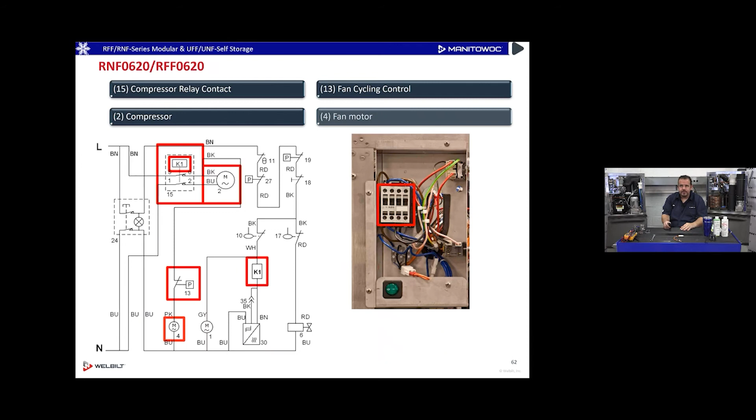All right, troubleshooting - if it's flashing, we're getting problems. We can bypass the time delay so you don't have to wait on that machine, and we can go through the compressor and the fan cycling switch too. Make sure everything's working. Go through your wiring diagram step by step.

In the real world, when I would come up to one of these, I'd basically turn it on, nothing would happen, and I'd be like, what's going on? I don't have any safety limits to look at. So then I would have to go through the safety switches one by one and see if they were open or closed. If any of those safety switches are open, the machine's not going to run. So if your rotation sensor is flashing, that means all those safety switches were closed, because the rotation sensor is last in the line on that unit.

Probably the most likely cause is you've got no water to the machine and the water sensor float is down, okay?

Toggle switch on a 1200 - the 1200 is a little bit bigger. Really the only difference with a 1200 or a 1,000-pound ice machine is you have a liquid line solenoid valve in it. It still has a rotation sensor on it - really that's the only difference. The liquid line solenoid valve is to prevent migration on it. So it's just to say, when I turn my ice machine off, this is such a big evaporator.

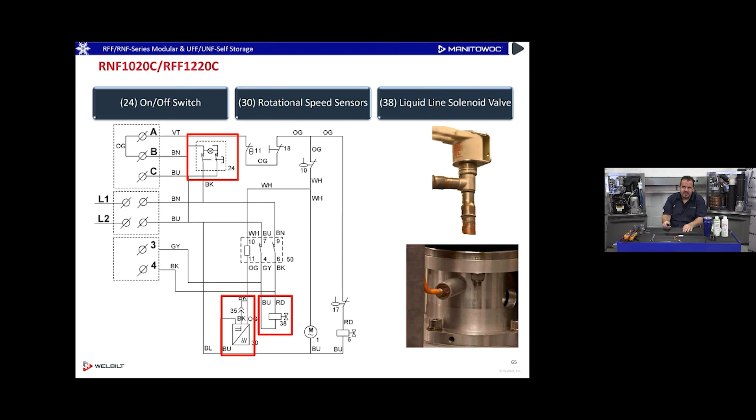I don't want my refrigerant to just float around wherever it wants to go in the system and then start up later. So I'm going to close that liquid line solenoid valve and trap my refrigerant from floating around in the system when it's off, because it's a much bigger system. That liquid line solenoid valve is in there.

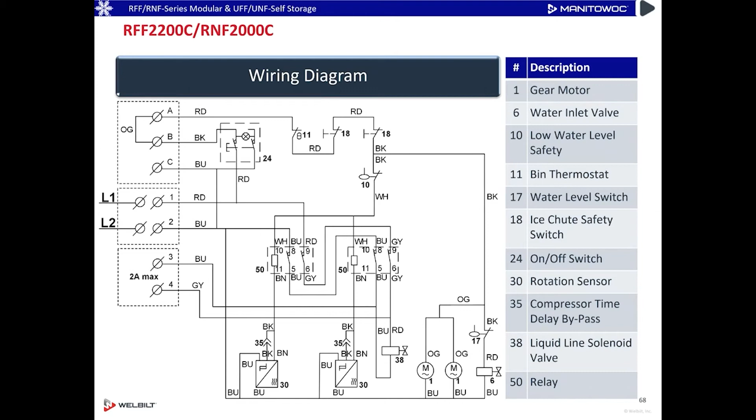All right, 2200 or 2000 ice machine. This basically has two 1200 evaporators in it. So it's got all the same safety switches, but it has two rotation sensors and two chute sensors on it for safety, one set on each evaporator. Two rotation sensors and two chute sensors, and a liquid line solenoid valve to keep it pumped down as well on this ice machine.

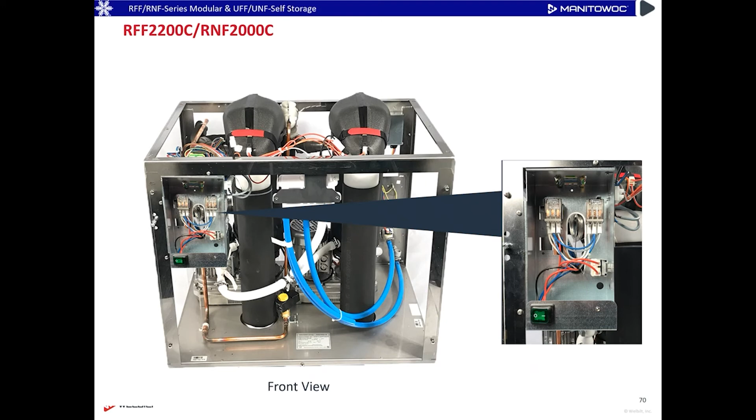You can see there are two relays in there, one for each auger, but just one compressor on this ice machine too. A lot of people ask me, if one evaporator's got a bad bearing, can I just jump it out and run just the other evaporator? Well, you cannot do that because this has only one compressor, and it would be overfeeding that one evaporator. It's designed and sized to feed both those evaporators. That's a common question I get.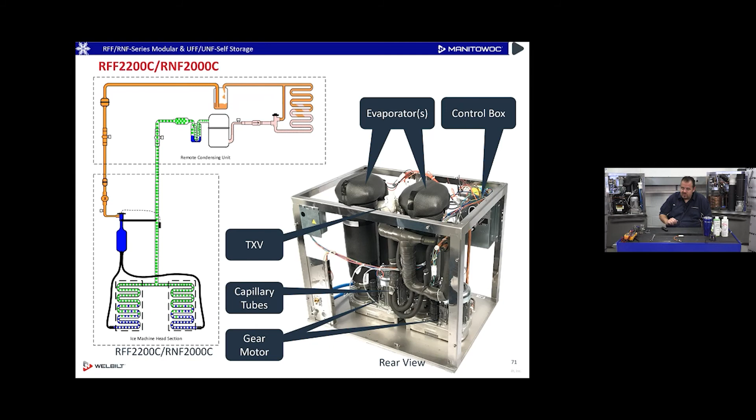The bin thermostat is located on the left chute of this machine to make sure everything's in good shape. So here we are, two evaporators on one compressor system, two gear motors on that unit, using one TXV on the top of that system. You'd see a big ice machine like this in a seafood store, and sometimes on top of walk-ins, raining down flaked ice or nugget ice into a big walk-in, where they'd shovel it and pack fish with it, and sometimes ship it all around the globe.

You can buy this 2200 ice machine in a remote condenser version, so we can put the compressor out on the roof to get the noise out of there. It's a big unit, it makes a lot of noise with that big compressor, but we can eliminate the noise if we want by putting it on a remote condenser unit.

I'm always tempted to call it CVD, but CVD stands for cool vapor defrost. There's no defrost on a flaker, so I can't really call it that, but it's the same scenario where the compressor and condenser are outdoors on this ice machine. It's got its safety switches, and we've got to get through all those safety switches for this to run on that remote unit.

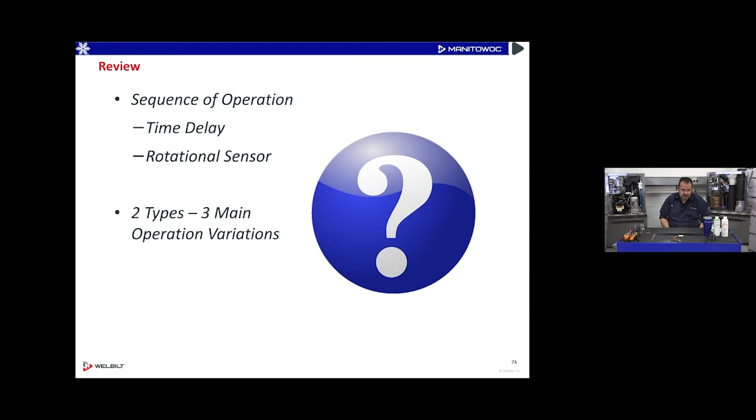Basically, the bigger the ice machine, the bigger the flaker or nugget, the more safeties it gets. Little tiny ones maybe only have a few safeties. Big machines are going to have more and more safeties to protect those bearings and those expensive augers and evaporators. We've got to protect them. People don't clean these machines, they scale up, and the auger wants to go sideways and destroy those bearings. Before those bearings get destroyed, we put safety switches in there to try and protect them on those units.

The last one we're going to look at today is the countertop CNF 201, 202 ice machine. This is a nugget ice machine, and it still has the same kind of evaporator in it as we just looked at, but it's contained in a unit that sits on a countertop.

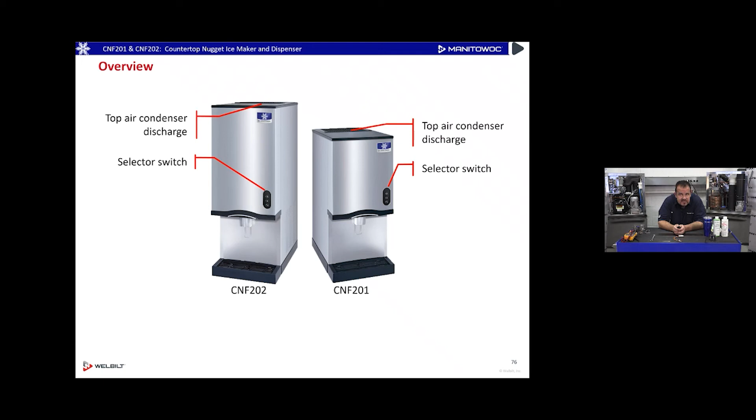It blows air out the top on the condenser, ejecting that air out the top of the unit. We have a selector switch to select if you want water or ice. There's a dispense chute on the bottom, and an on-off switch just underneath on the unit, which also has a clean switch built in. There's the dispensing lever, drip tray, and condenser air intake, which comes in on the bottom right and blows out the top of that unit.

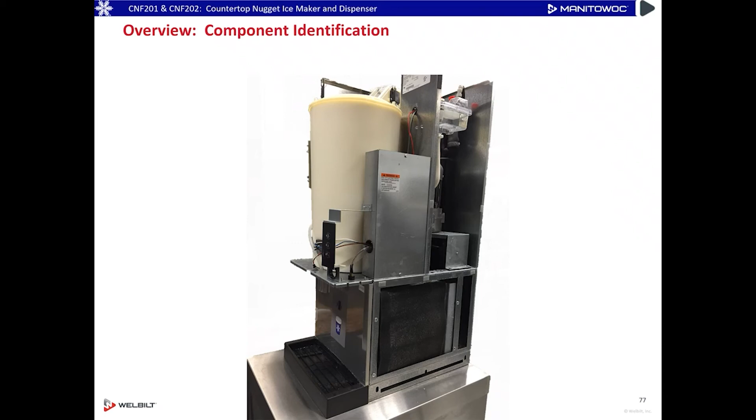So here it is without the panels on. You can see there's an air filter in front of that condenser, just a materialed air filter on that machine. There's the float assembly, gear motor, control box where my control board is located, on-off switch, condenser air filter, drip tray, and touchless dispensing on this one. You can get this in manual dispensing with a lever where you push your cup, or you can get it in touchless dispensing as well.

Dispensing chute, dispensing selector, ice storage bin, data plate.

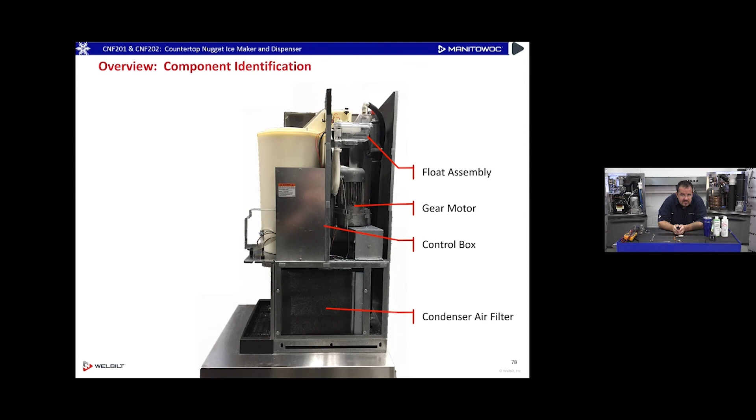This comes in two flavors. We either have a 20-pound bin, that white bin there, that holds 20 pounds of ice, or a 10-pound bin that holds 10 pounds of ice. Everything else is pretty much the same. Just one that's taller, one that's shorter, one that can hold more ice in the dispensing bin. Same compressors, same evaporator, same auger, everything the same. We just have a slightly larger bin on those machines.

All right, let's take a look at the top. Automatic expansion valve — so that's kind of weird, right? And a thermostatic expansion valve you've heard of. But an automatic expansion valve is just an expansion valve that doesn't move. It sounds fancy, but it's just a valve that doesn't move. It looks like an evaporator pressure regulator or a crankcase pressure regulator, it just doesn't move, it just regulates. So it's got a little hole in there like an expansion valve, but it just doesn't make that hole bigger or smaller, because flakers and nuggets like this nugget don't have a wide range of power on them. They just make ice at the same rate all the time. They don't go through these big changes in heat that a cube machine does.

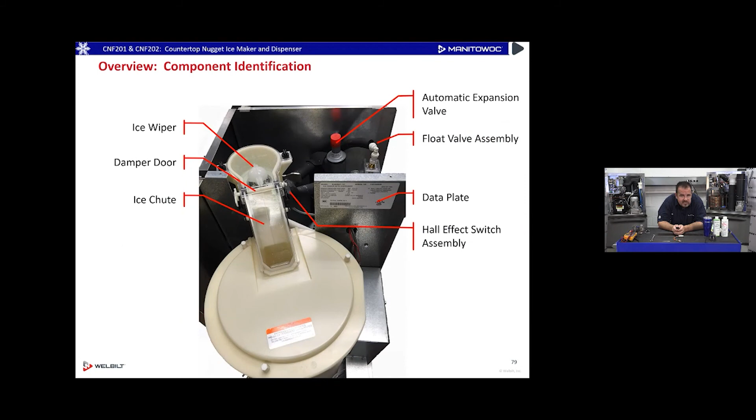Float valve assembly, data plate, Hall effect switch sensing the ice coming down the ice chute, and a damper door in there that senses it. We have an ice wiper up top there too, just like the other one. It's just a little smaller and a little bit of a different material, okay?

This does have a control board. Let me get some water here. I know we're at a time limit, I've got about 5 to 10 minutes to go, okay? That's about it. I knew this would run over just a little bit, but that's fine. I'm here all day. No.

So here's my control board. Inputs on that control board: we've got a switch to tell it if it wants ice, off, or clean cycle. And then we got some weird Hall effect switches, right? And we'll take a look at those as well.

This is where my Hall effect switch is. It's basically a positional switch, and it's 2 positions. There's Hall effect switch 1 and Hall effect switch 2. You could think of it like a magnetic bin switch. It's really not — that has 2 different positions. There's one position it senses, and then there's a second position it senses. It senses when it's halfway up, and it senses when it's all the way up on there.

There's a float switch. I don't want to run this machine with no water in it. That's bad news for my nugget ice machine — it's going to cause damage. And there I've got my on-off clean switch on that unit.

Outputs — so I've got some outputs on this machine. You can see I've got 3 relays, so I must have 3 outputs: a dump valve to drain the evaporator, a gear motor to turn the auger, and a compressor contactor coil to run my compressor on those outputs.

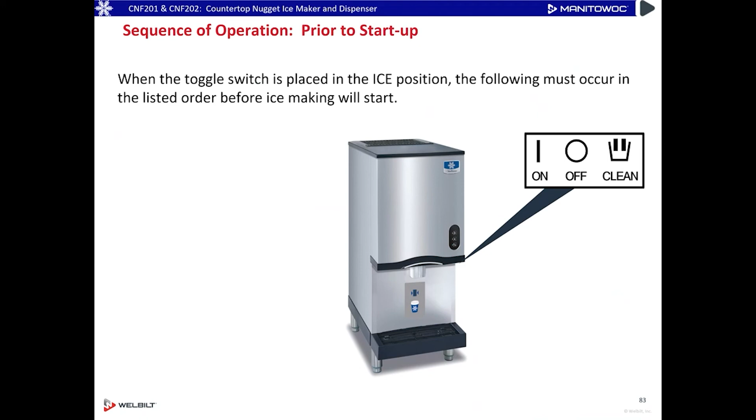Prior to startup, 15 minutes prior to startup, delay period must expire. 15 minutes — oh my gosh, I haven't got that long to wait. I'm a technician, I can't wait 15 minutes. This is to make sure there's no ice in the evaporator before you start it up. So you can bypass it — I'll show you that too.

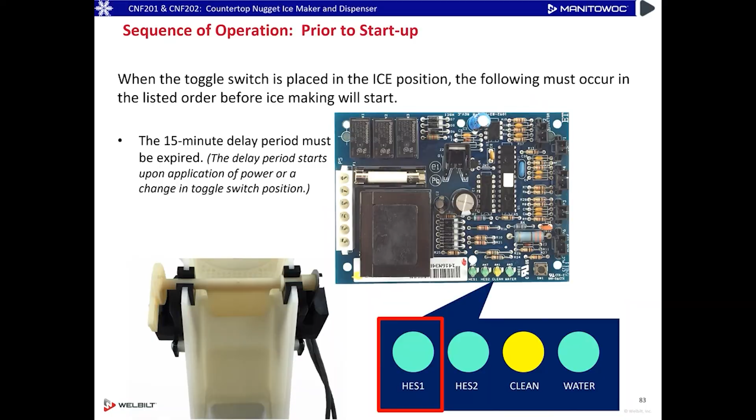So HES1, this is when the damper is all the way down. HES1 light will be off, telling you it's okay. So this is my bin switch right here — the damper in the chute is my bin switch. When the damper gets stuck open, I turn off on full bin. The HES1 and HES2 positions on this damper: when the damper's halfway up, HES1 light goes out. When the damper's all the way up to the top, HES2 light goes out. So HES2 is your full bin.

HES1 makes sure that you're making ice, that nuggets are coming down the chute and then moving that damper around. Again, we're going to use nickel safe ice machine cleaner because this is a nugget ice machine to clean.

So to get this unit running, my time delay has to be expired, my water safety has to be in good shape, and my ice chute damper must be in the down position to tell me it's not on a full bin on that machine.

So here's my water float, sensing water in there. I'm good to go. I can see I got water in there, and then I'm going to make ice and go through my startup. This one's kind of unusual because it does have a dump valve in it. That's kind of cool though, because I can drain all that water out the evaporator and start off with a fresh batch of water in my evaporator.

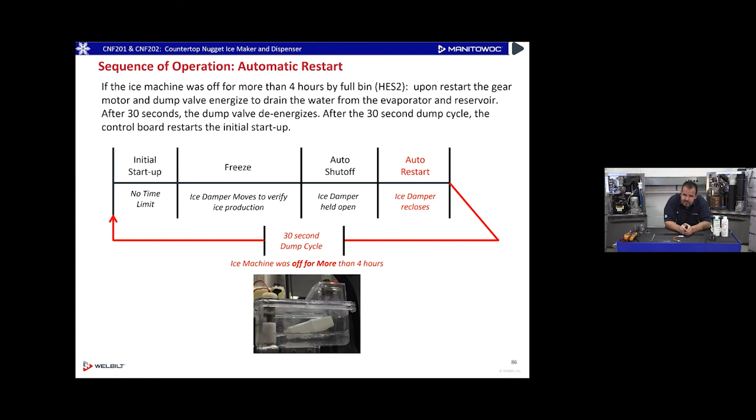That helps to keep my evaporator nice and clean and purge all the minerals out of it. Think about it like this: if you've got debris in your water, scale and little bits of debris, where's it going to go in the evaporator? It's going to sink and sit on that water sill every time. So the fact that we can drain this evaporator out, that's a pretty cool thing to have a dump valve in that evaporator.

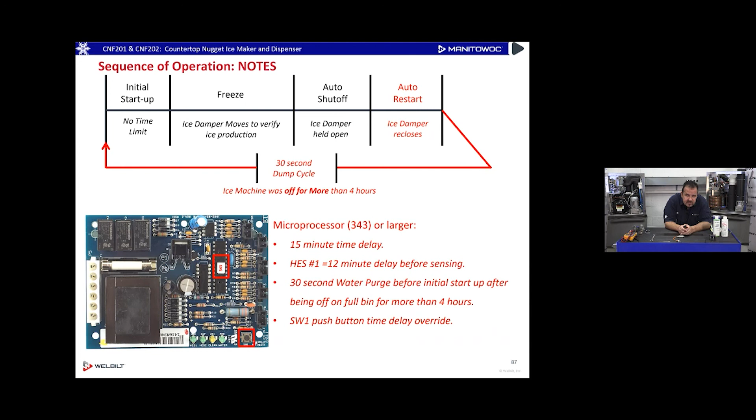So it's a 30-second dump cycle, and the machine was off for more than 4 hours. We've done various updates on this board, but today's board looks like this. There's a 15-minute time delay, a 30-second water purge on this ice machine, and you can bypass the delay by pressing that little button. So if you're a technician and it's in the delay and the lights are going up and down, you can press that button and it'll bypass the delay so you don't have to wait.

Refrigeration system, nothing to it. Just a real simple automatic expansion valve, an evaporator, a condenser, dryer in there, compressor on that ice machine with a heat exchanger. Real easy automatic expansion valve system.

So we looked at a little countertop, only available in air-cooled, no water-cooled versions, only 2 versions of it. Basically, the only difference is the size of the container that holds the ice in that ice machine.